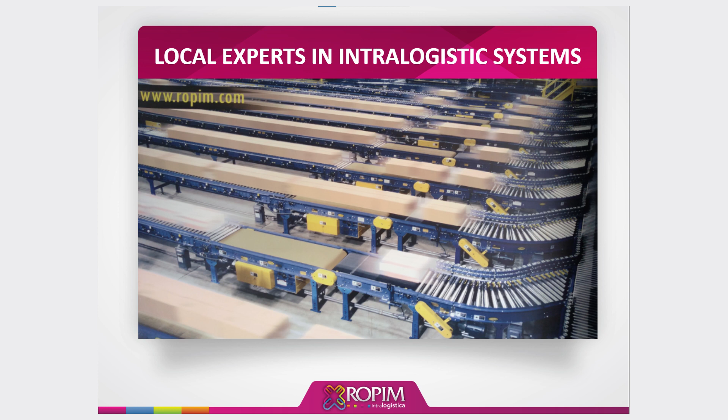This is a series of seminars designed by Ropim with the main objective of providing you with knowledge. We are going to start today with tabletop belt conveyors and live rollers. For those who do not know, Ropim is a company with more than 48 years of experience that provides comprehensive package flow solutions that help companies solve the most demanding challenges of internal logistics.

Ropim is an intralogistics company that has two fundamental pillars: integration in Latin America and cutting-edge technology. Integration in Latin America is done from Colombia, with our main office where we have our production plant, and from Peru, where we have our commercial office. We have projects in Central America and South America focused on the Andean area: Colombia, Venezuela, Ecuador, Peru, Bolivia, and some areas of Uruguay, Paraguay, and Chile.

We have a strategic ally, Hytrol, which has had a relationship with Ropim for more than 25 years that has allowed us to train and integrate different types of projects and systems. Ropim develops systems for manufacturing environments, warehouses, distribution centers within a wide variety of industries such as catalog sales, textiles, baggage handling for airports, or any other sector that needs a unique solution to an internal logistics problem.

We have three defined objectives for this seminar, which are to describe the basic generality of tabletop and live roller belt conveyors, explain applications of the equipment developed and installed by Ropim, and we have some supporting images and videos at the end of the presentation. The first thing is to have a general overview of what conveyor equipment is and what it is used for. Conveyor equipment is used to move boxes, baskets, packages, bags, bundles, or envelopes from point A to point B, upwards defying gravity, or downwards with a controlled speed.

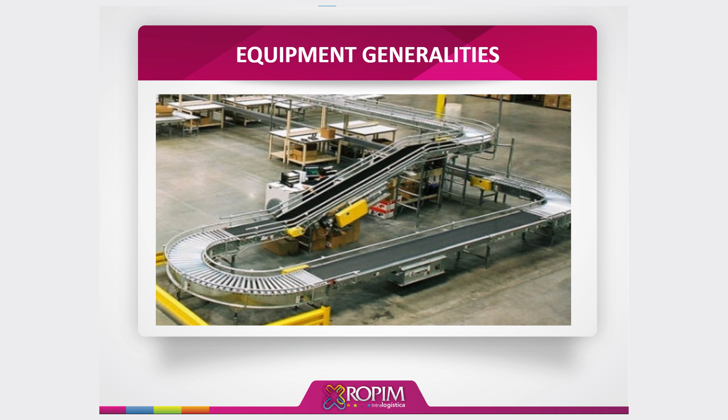Generality of band equipment. They are equipment where the surface of the band or tape is in contact with the product. We use solutions that require supporting the product, more precise control of the flow, and improving product grip, such as bagging or variable morphology. These can be on packages, shipments along curves, and for applications on inclinations or declines of this equipment.

We have two types of power supply: three-phase equipment from 220 to 440, or equipment with 24-volt motors. The 220 to 440 units have a capacity of 75 to 100 pounds per foot. They are used for applications in ascent and descent of small bagged products, or with high-speed scanning tunnels that allow us to vary products such as bags, packages, boxes, baskets. The 24-volt motors are used to contain products or accumulate in areas of products that move in line. The capacity of these equipment is a little less than 75 pounds per zone, or 37 pounds per roller.

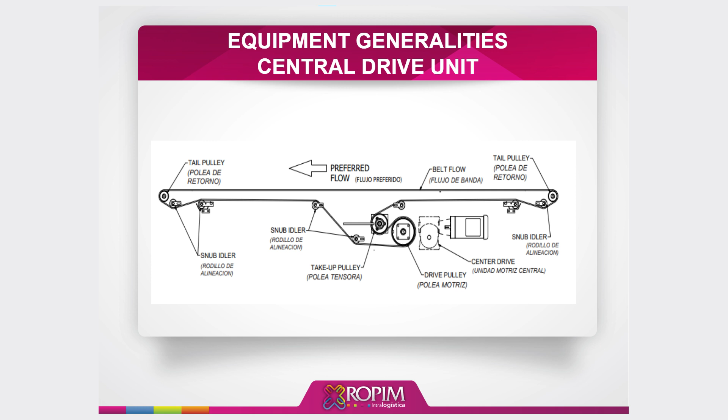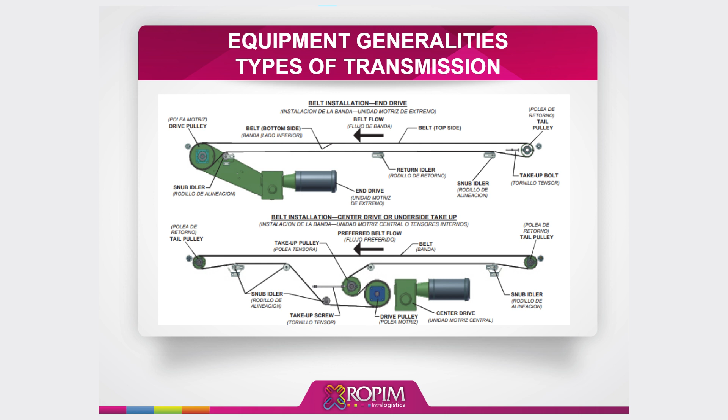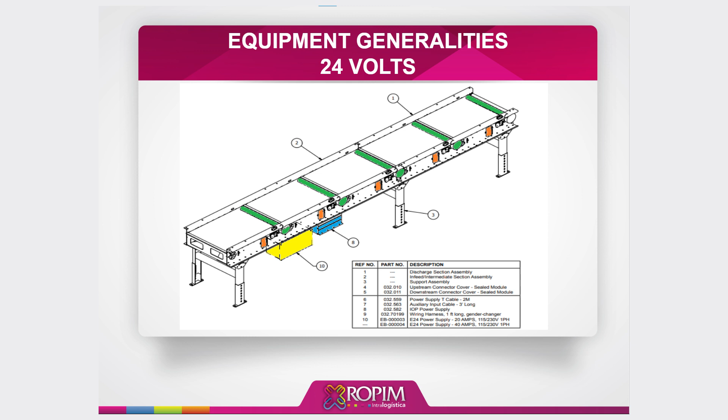Of these we also have two types of power supply, one that is three-phase 220/440 and another that is 24 volts. The three-phase we have from 75 to 100 pounds per foot in capacity, and in the 24 volts we have from 37 pounds to 75 pounds.

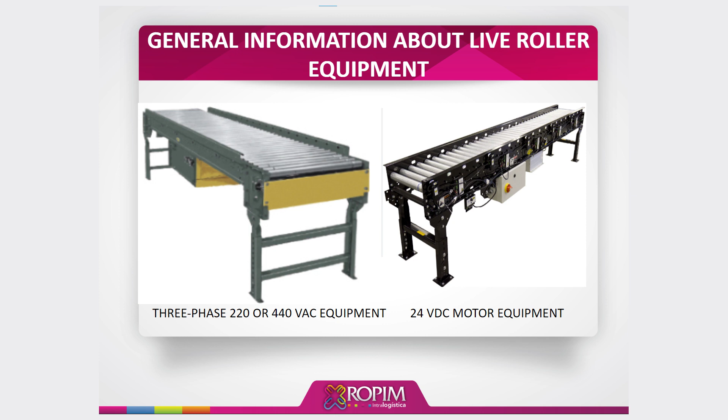In these equipment we have three types of transmission, one that is by belt, others that are cardan shafts and others that are V-belts. These are the most standard that you will find on the market. Others also such as Poly-V belts or with roller motors, but they are not very commonly used in the market because spare parts are difficult to obtain and are not available locally.

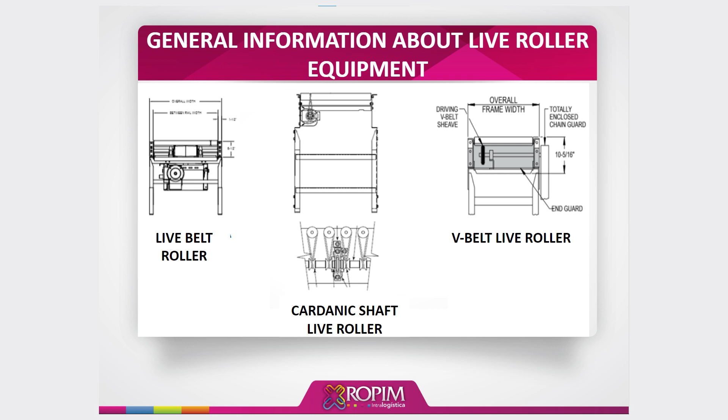Here we also have some very basic parts of the equipment very similar to the previous ones with a central drive, a driving pulley, a tensioning pulley, some end pulleys at both ends. But we have here some return rollers under the equipment and the transmission rollers that give movement to your product, the motor and a tensioning system that must be in all equipment.

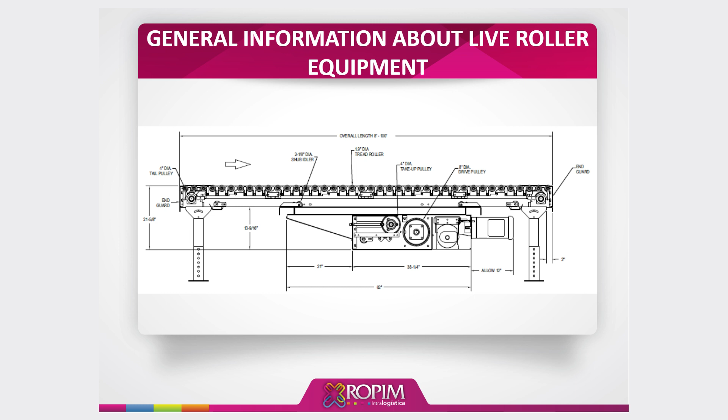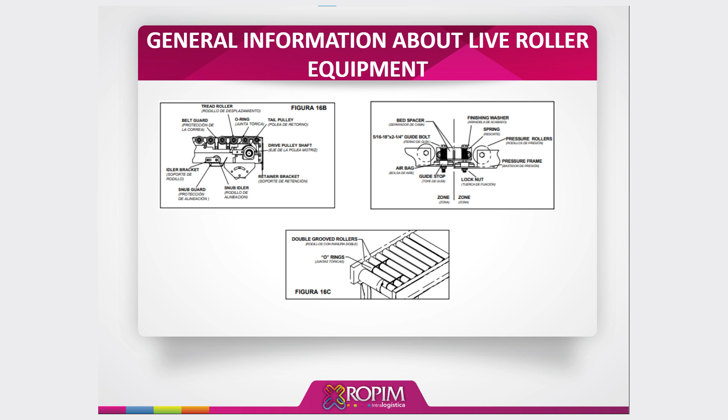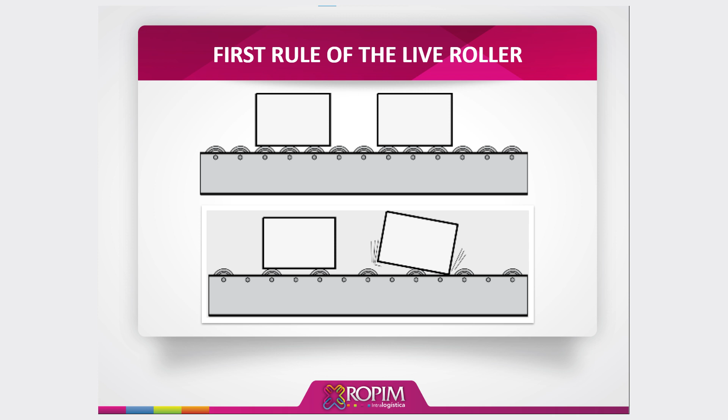For live roller equipment there is a very important rule. The first rule that you must keep in mind is that you must always guarantee that three rollers are under the product to prevent jamming or overturning or that the product comes out or does not have good contact on the system.

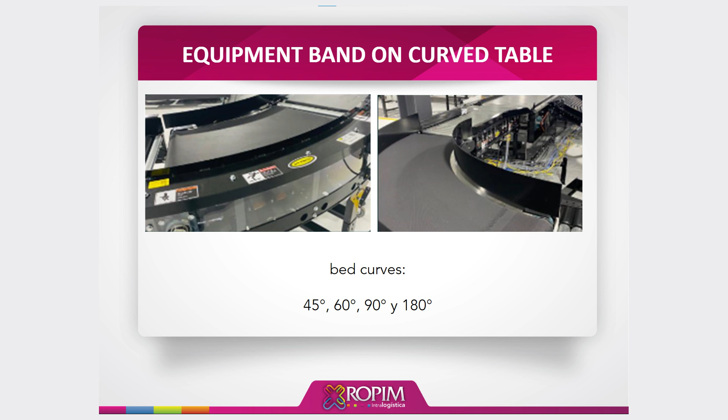In the band and roller equipment we also have curved equipment. In the band equipment we have curves of 45, 60, 90 up to 180 degrees. You will wonder why not place a 90 curve next to another 90 and you would have 180. On the market, you will have the ability to have a 180 curve with a single motor. In the roller equipment on curves we already have a wider range where you will find curves from 30 degrees through 45, 60, 90, 180 and combinations with curves with spurs of 45 or 30 degrees.

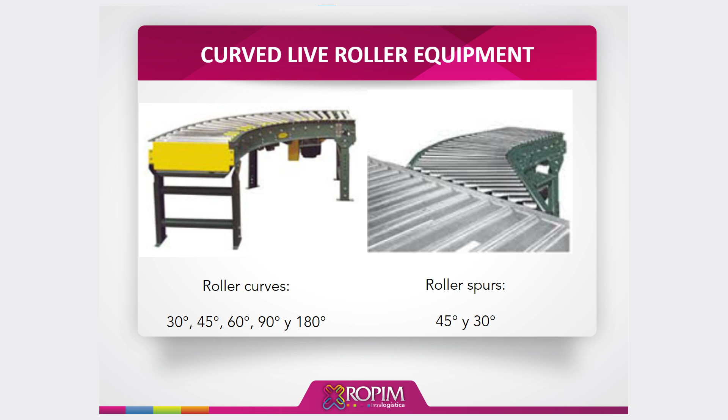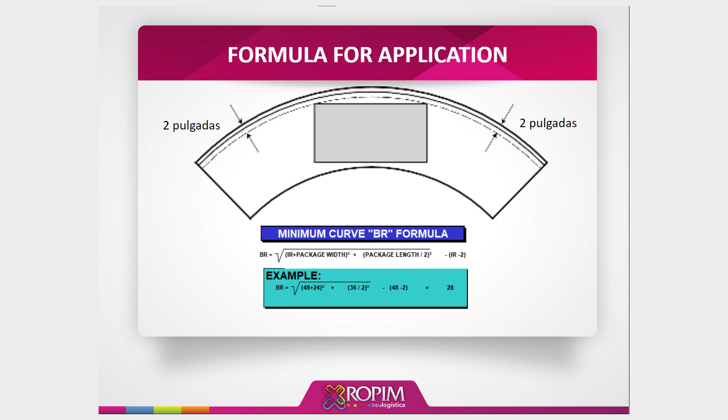For the good selection of a curve there are some application formulas. We are not going to go into depth about this formula, but to make this decision the engineering team that is going to provide you with advice should always have the ability to give you the best decision taking into account these formulas.

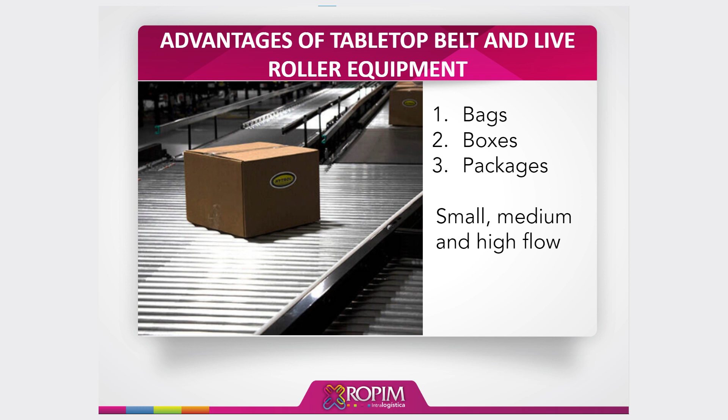There are some advantages to using belt equipment or a live roller table. You can handle a variety of products, bags, boxes, packages, baskets, other bags that do not have a specific morphology defined. Small, medium, large, they have great versatility. In addition to that we can place a mix of products or be able to send a single product. We can send only boxes or only baskets or we can send boxes, baskets, bags in different configurations and with system accessories. System accessories are additional training that Ropim will provide, where there are transfers, diverters, pushers, weighing.

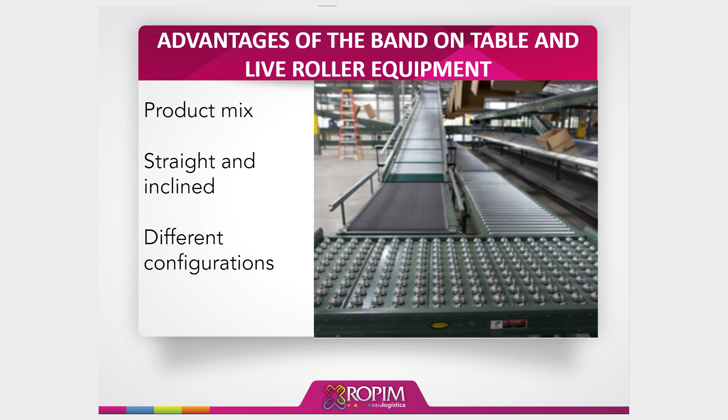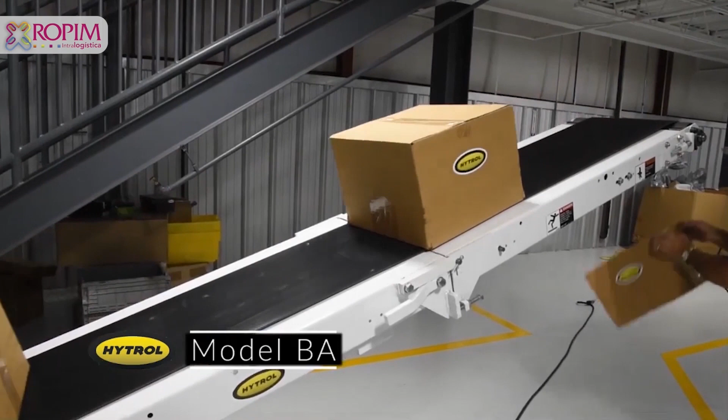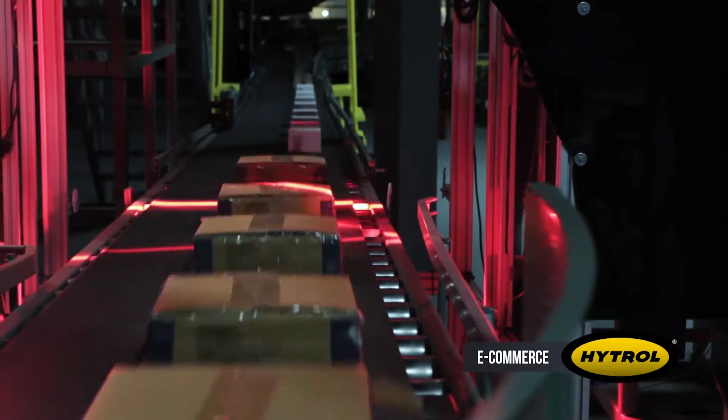Here we are going to see a video of the tabletop band so that you have a little more clarity. The tabletop band equipment guarantees a constant flow of movement at high, medium and low speed for medium and small pieces packaged or loose. These equipment can handle high, medium and low capacities and can also be configured to any available length and width. They are an economical and reliable option for transporting products of various sizes and shapes.

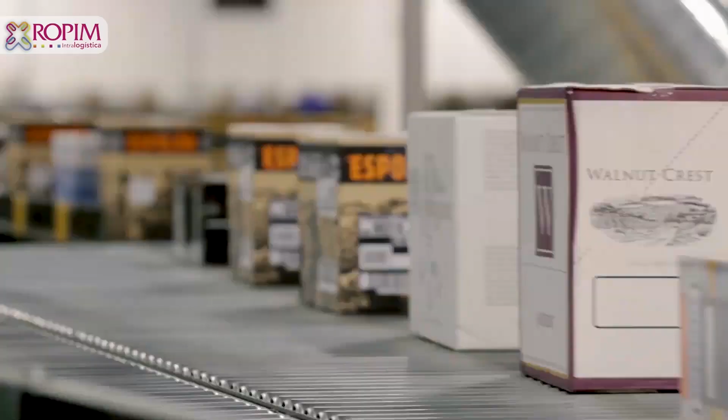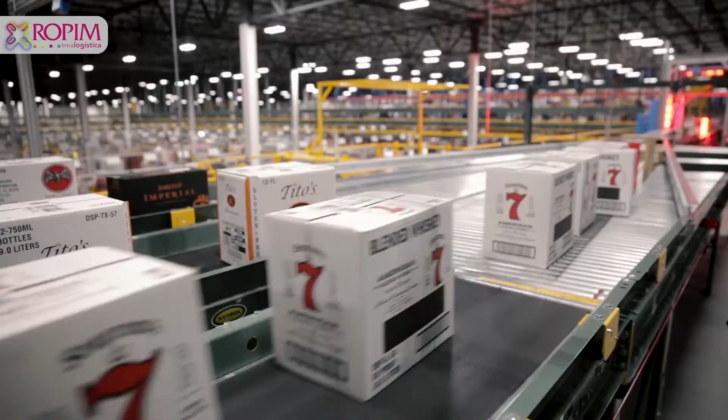Now let's see a video of live roller equipment. Live roller equipment is a drive that uses energy to propel products in boxes or bags along the production line or to palletize. It is an economical solution for different industries and applications. They are used for stable and heavier solid products, can accumulate the product and are widely used in manufacturing processes, classification, inspection and packaging.

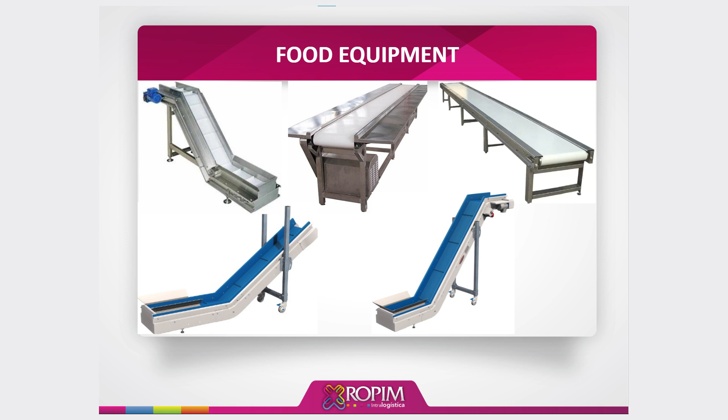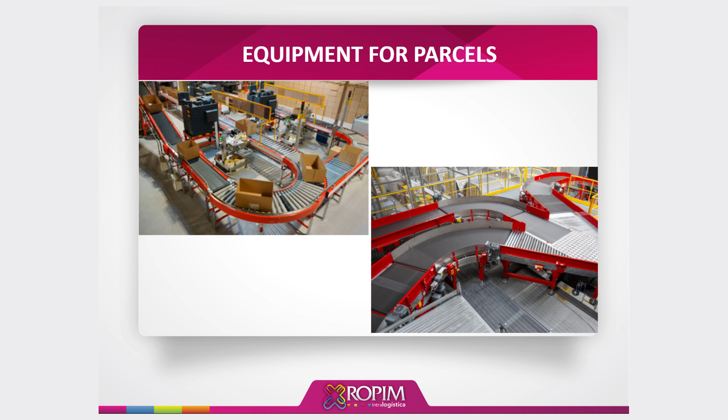Manufacturer so that they have a good equipment selection. Here we are going to see selections of equipment or some photographs where you can see a combination of equipment in parcel companies, where we see a mix of products with curves, spurs, belts on a live roller table and different types of products on the system.

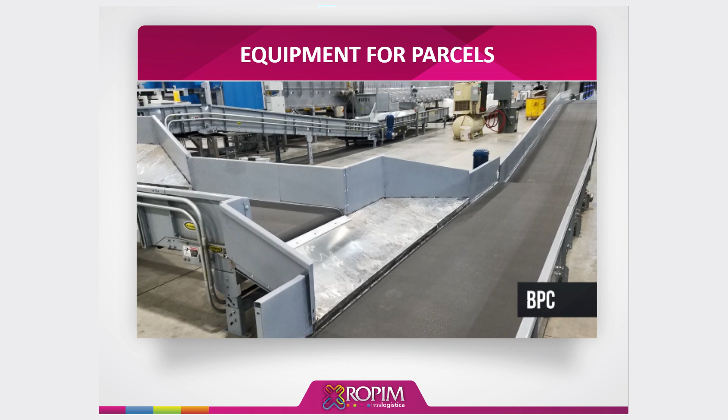We also have system accessories where there are combinations of chutes that are already pre-designed and established for this type of applications. If you see, there are also some special types of guards that are also accessories for the equipment. In this image you can notice the different levels with this type of guards that will prevent us from falling out during different level changes or different direction changes. All of this has to be guaranteed at the time of making the design.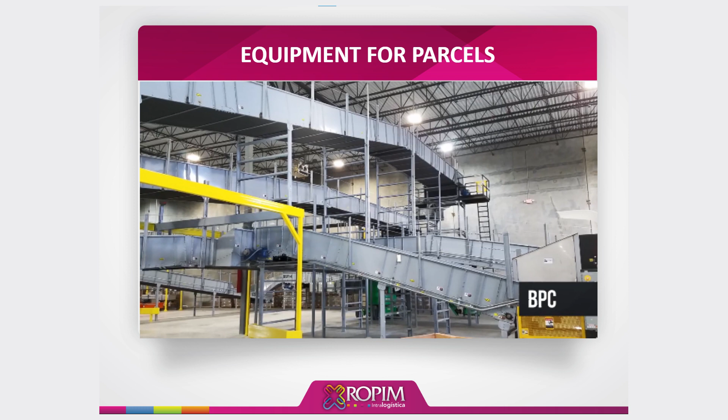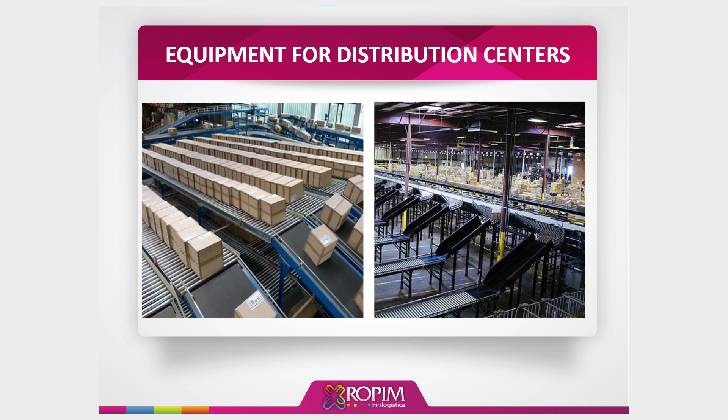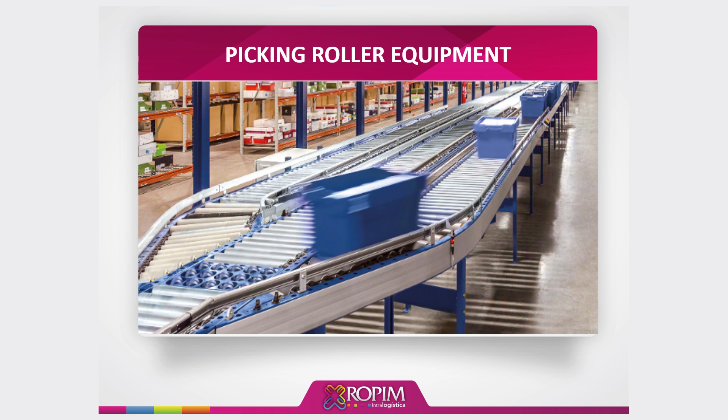We also have distribution centers where there can be a mix of live roller products, belt on table, curves, spurs, exits and entrances. We have picking equipment where there are inspection areas, also combined with accessories such as diverters, transfers, different speeds, ease of use with personnel next to the equipment, safety systems for all equipment tractions.

Here we have some input data. You will always have to take something very much into account to carry out your development, which is that you have to have very clear data so that the person who is going to develop or accompany you in the development of your project is very clear about all the bases and input data to make a good system.

The first thing is that you have to define which products you are going to transport, be very clear about the dimensions, the weight of the product, the length, the height. If you have already defined the conveyors, provide the dimensions of length, width, height. Between the two people or the two companies, have the dimensioning, the flow of packages or products per hour, the operating time per day, the environmental conditions to which it will be subjected, if it is in a cold chamber or saline environment, or in a coastal area or outdoor conditions, known to you as those directly in charge of your processes.

A minimum description of what you need the system to do. You need to do a reading, do a weighing, and also make a definition of the area where it will be located; if possible, send a layout or do it in AutoCAD where the measurements can be a little more precise. The design and some general observations of the process will be much more reliable.

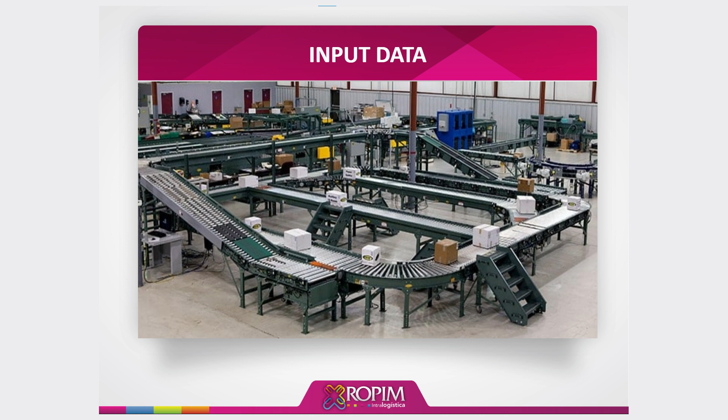In the guarantee of projects, when you need to carry out a project, a company with support will always accompany you from the beginning of the design, the choice of the equipment, the power calculations, the dimensions, the 3D modeling in AutoCAD, the possibilities and opportunities for improvement of the system. This is a company that will guarantee your project and that wants a relationship of trust. It does not want to just make a quote.

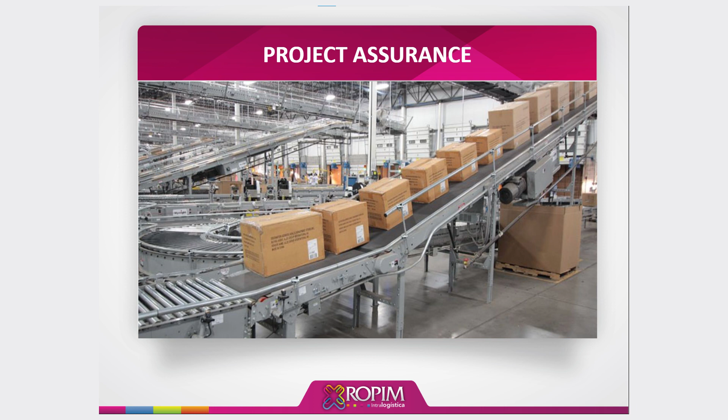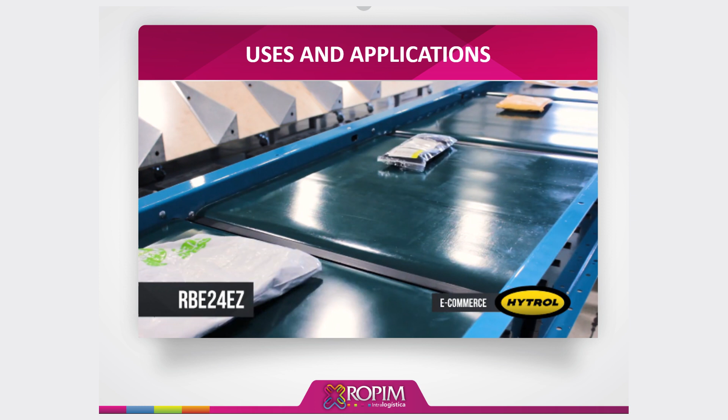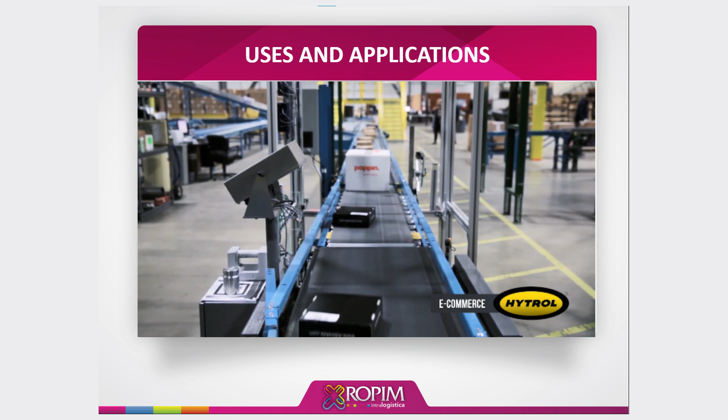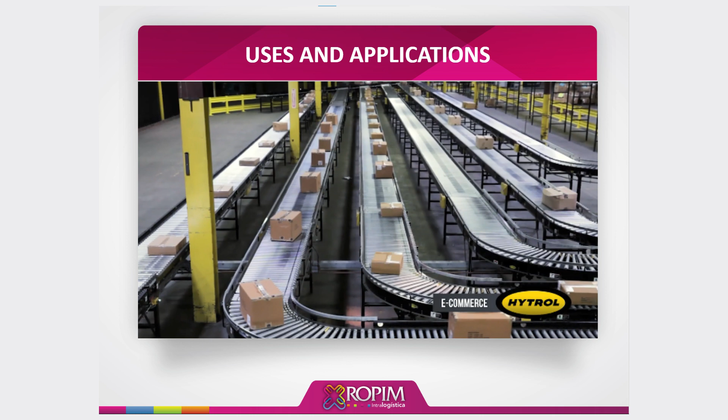Here we have some RBE24EZ equipment where we see different products on the equipment. You can see envelopes, bags, packages, and it can also carry baskets and boxes. On this slide we can also see that barcode readers can be used and there can also be volumetric weighing systems. There are uses of combinations, controls, traffic control, or only transportation. Here we already have a more complete warehouse where the product lines handle combination systems, diversions, readings and weighing.

What you require is not always complete systems; there are also possibilities of having individual equipment. These can be used in loading or unloading trucks, level changes with mobile or fixed equipment, for marking and labeling processes in maquilas or low turnover processes.

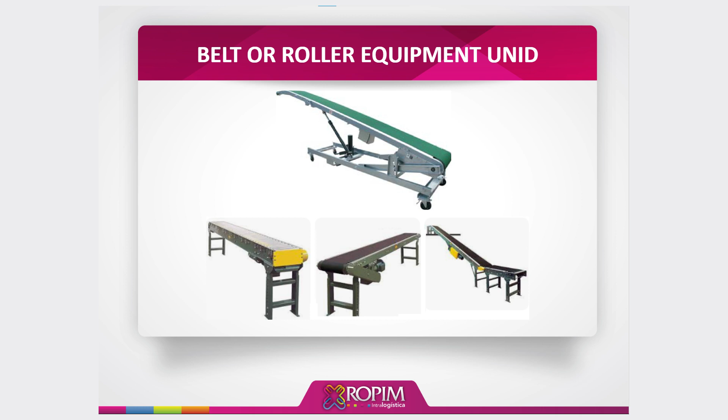Whenever you purchase conveyor belt equipment, you must be aware that they are machines and require training. The training must be on safety in use and maintenance. At the end of each project, request the operations manual, where the parts of the equipment, the installation requirements, the requirements for assembly, and preventive maintenance scheduling should be. These are applications and processes that you should always take into account for the generality of this equipment.